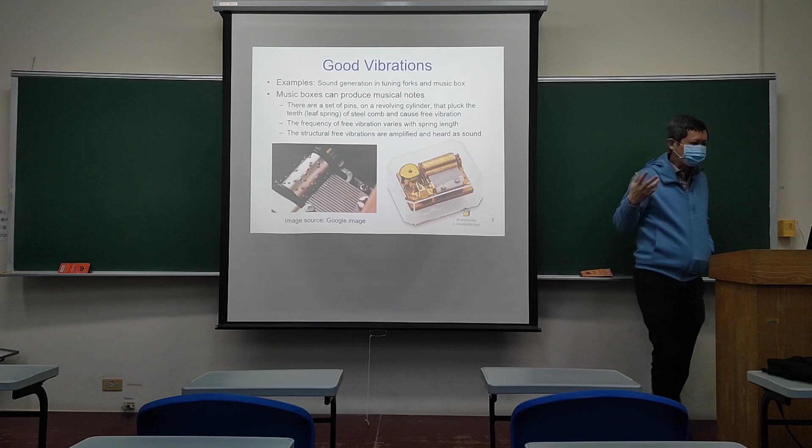Good vibration could be the sound created by a musical instrument. Sound itself is a vibration, but here we are looking at the structural vibration of the musical box.

What is vibrating are the cantilevers of different lengths. The longer the cantilever, the lower the frequency.

Basically, for an octave, you have 8 notes, and the frequency doubles. So here what you see is a drum with a protrusion.

This protrusion will then pluck the cantilever up and down. This small vibration cannot be heard without an amplifying box.

Just like shaking a ruler, you cannot hear the ruler vibrations, but with the help of the amplifying chamber, you can hear it. Another reason why you cannot hear the ruler vibrating could have to do with sensitivity.

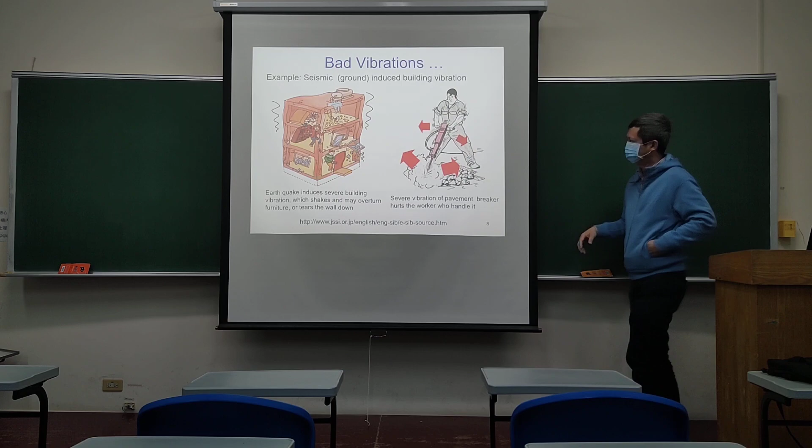Of course, you also have unwanted vibration. This is a musical instrument, but unwanted vibration happens during an earthquake, and unwanted vibration happens during concrete breaking. Using a concrete breaker, that kind of bad vibration could be dangerous, causing fatigue to the worker.

What's the objective of this course? We are going to learn the basic concepts about vibrations. So what are vibrations?

There are free vibrations. Free vibration means that after it was put into vibration, there is no more force that moves it to and fro.

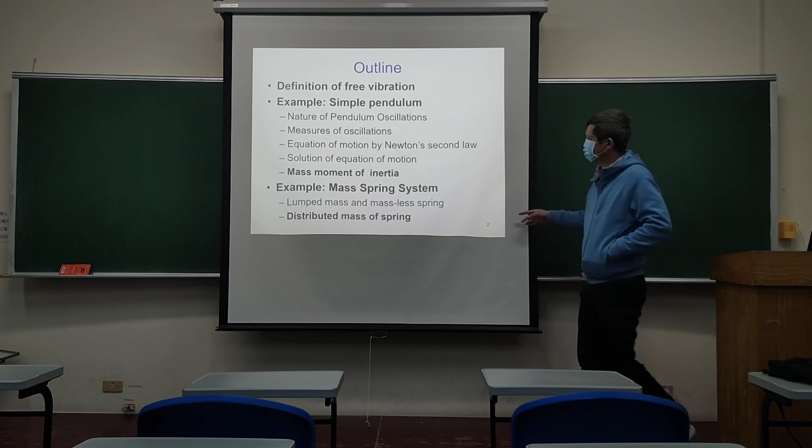So the first thing we're going to learn about is free vibration. The first example is going to be the pendulum, so we're going to study how the pendulum oscillates. I think you learned it in high school or secondary school, but this is part of the physics, and we're going to start with that.

To help you get a better understanding about free vibrations, we're going to first measure the oscillation, and then formulate the equation using Newton's second law. Most importantly, we're going to solve this equation of motion using a simple ordinary differential equation - we will use this simple differential equation to solve the pendulum's equation of motion. Later, we're going to introduce you to mass moment of inertia.

In the next example, we're going to study the mass spring system.

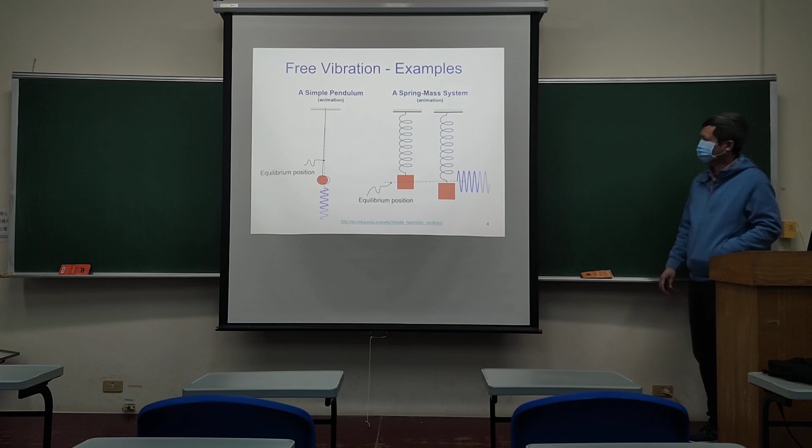What is the common thing between the simple pendulum and the mass spring system? You can observe that the motion of the pendulum is a left and right swing, going left, right, left, right. If you track the angle over time, you see this oscillation.

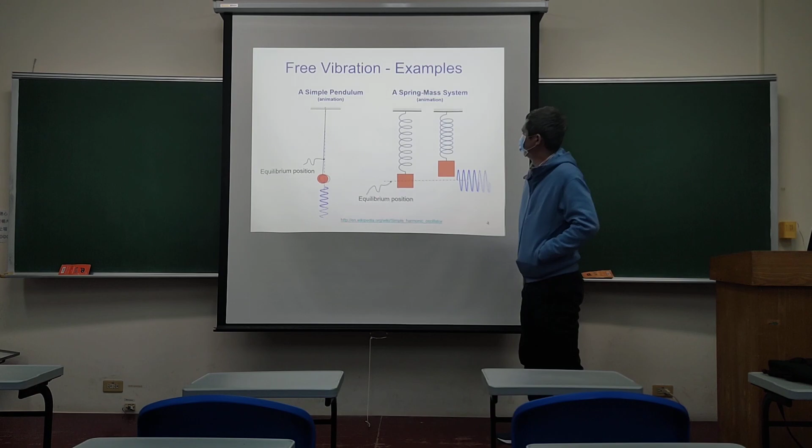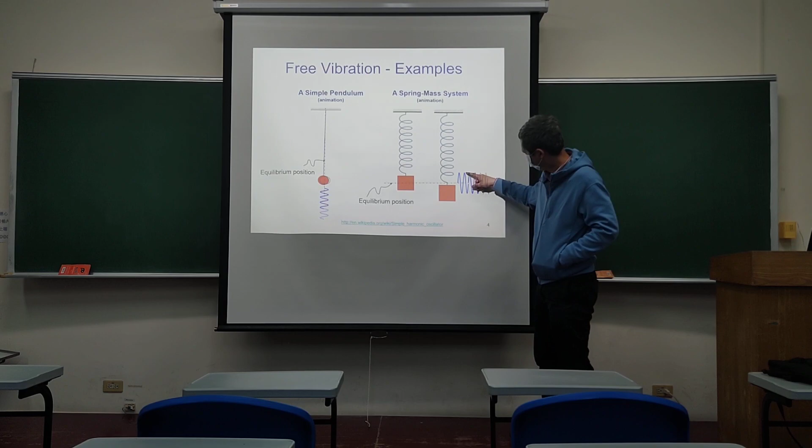In the mass spring system, you have a mass and a spring. When you release the mass, it starts stretching the spring. When the spring is overstretched, it recoils back, so the mass moves up and down, up and down. Following the mass center over time, you see a sinusoidal wave.

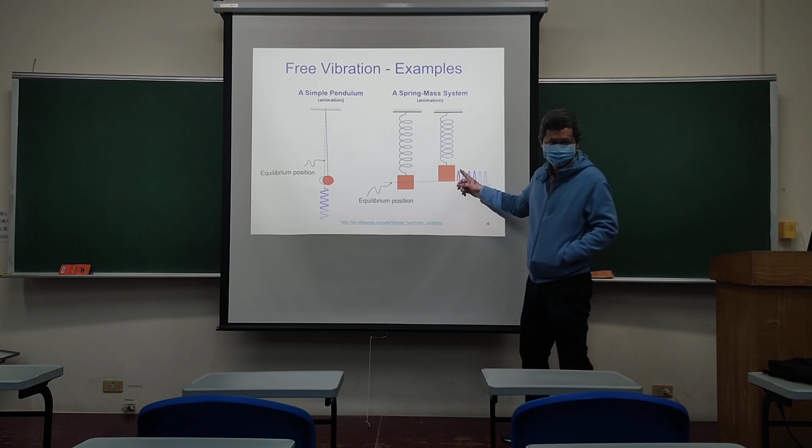This sinusoidal wave has a feature of repeatability of common period.

So how does the mechanical pendulum work? The invention of the pendulum happened in Europe, in Italy, in the Middle Age. Galileo invented this pendulum while observing candlestick vibrations in the church.

Let's see the reinvention of the Galileo pendulum.

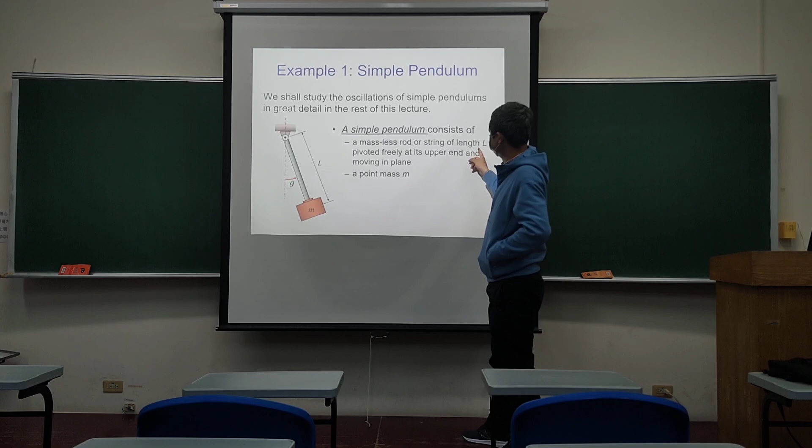One thing about a pendulum: it is a rod and a mass. Because the mass at the tip of the rod is so big, you can assume that the rod carries no mass. So in a simple pendulum, we have a massless rod, and at the tip of the rod you have a point mass. This rod has a length L.

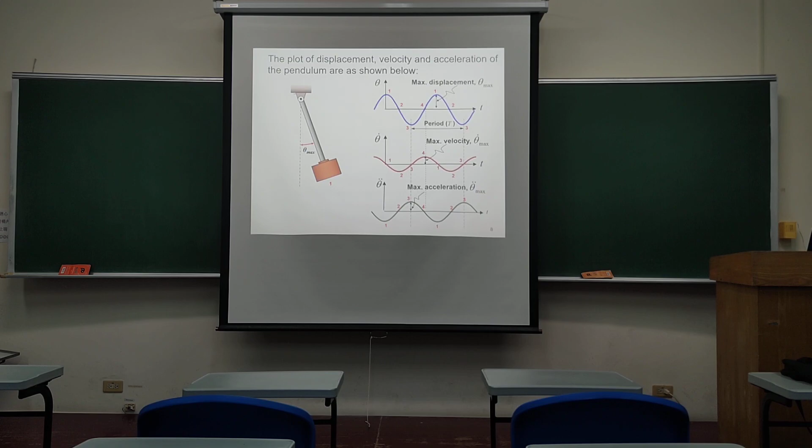Now we're going to see the motion. When you start the pendulum, how do you look at it? This room has a pendulum, like a broom — 单摆，这边的扫把。So this is a pendulum. If I start the oscillation, you can see it must start with the mass elevated up, and my finger will hold it like a pin.

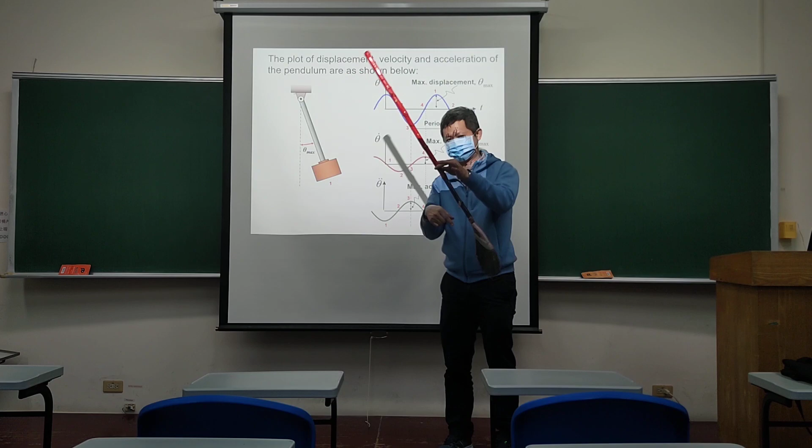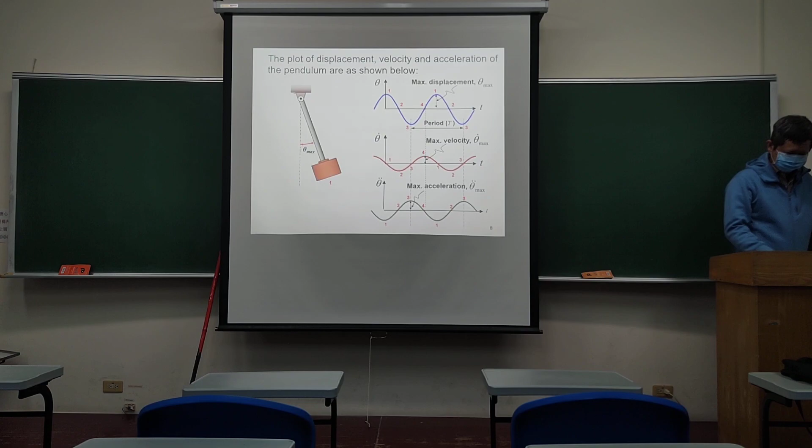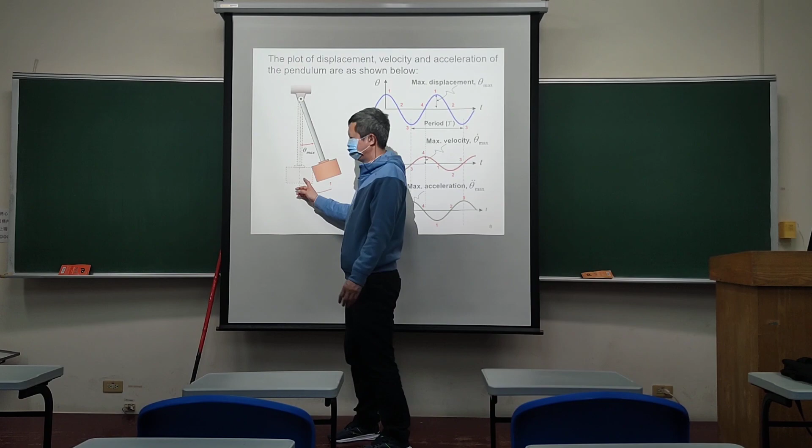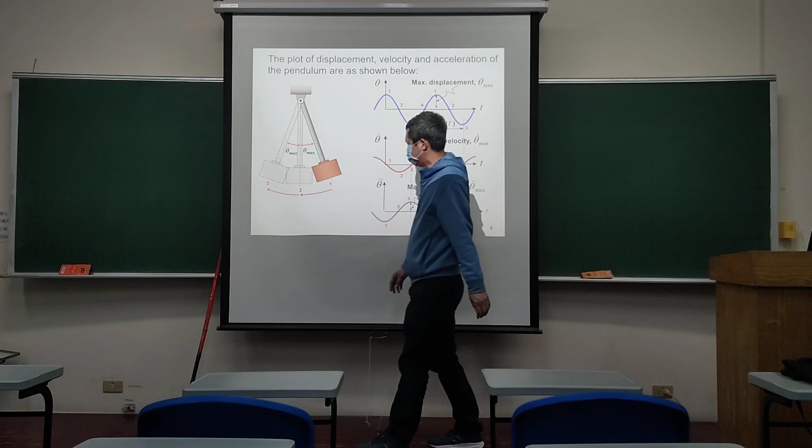When you start releasing the pendulum, you start with the starting angle, theta max. When released, gravity pulls the force toward the lowest point, so the mass gains speed moving to the lowest point. Once it reaches the lowest point, because the speed is non-zero, the mass keeps going to the opposite side. When it reaches the opposite side, most of the kinetic energy has been converted into gravitational potential energy, and it comes to a stop.

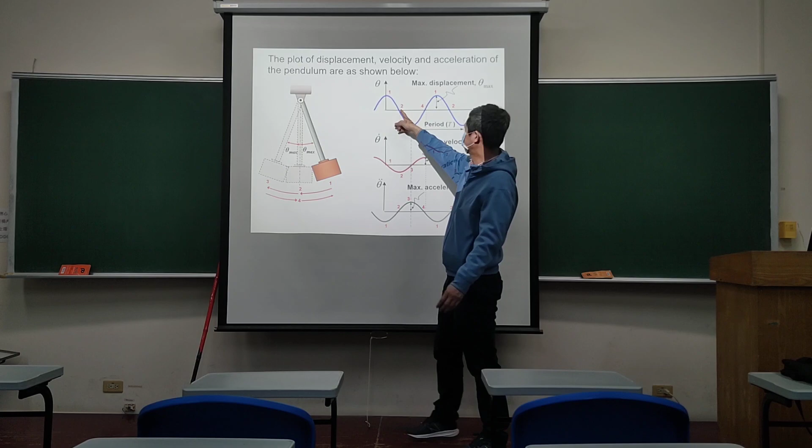If you track the angle, it starts at position 1 being non-zero. At position 2 it becomes 0. At the opposite point, the angle becomes negative. Once it swings back to the lowest point, position 4, it finally reaches the initial position. If you observe this oscillation, the peak remains the same if there is no damping. The time taken for one peak to reach the next peak is called the period. The maximum amplitude from the peak to the neutral point is called amplitude.

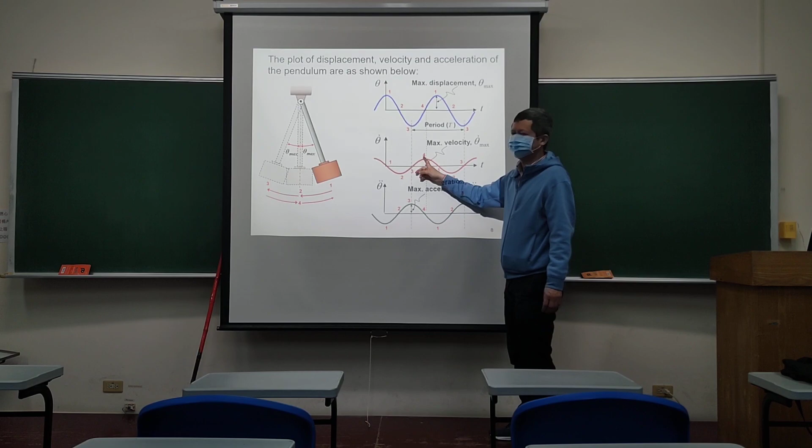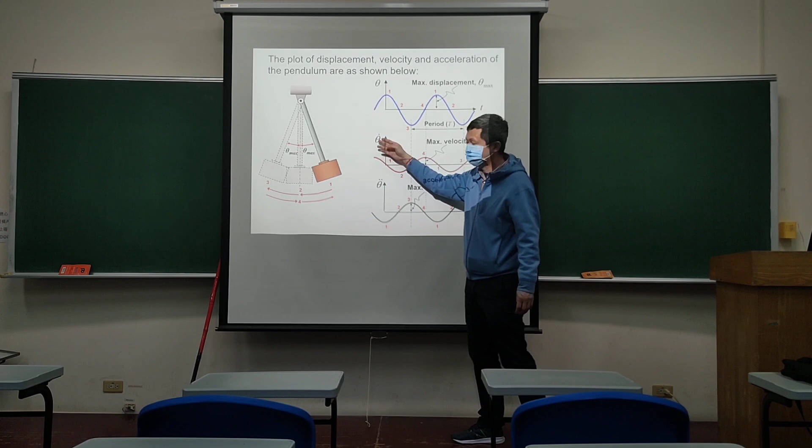If you do differentiation of this angle, you obtain the angular velocity, and the sine wave becomes a cosine wave. If you differentiate the angular velocity one more time, you get a negative sign. So your acceleration is a reflection of your angular displacement over time.

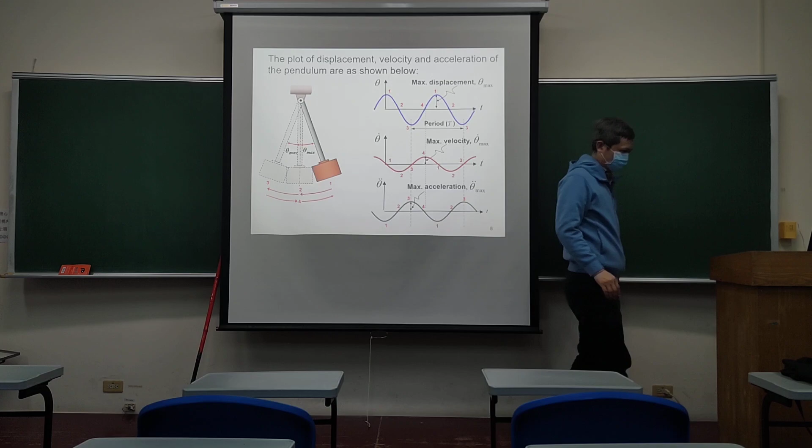This periodic motion can then be expressed as a sine wave. It has an amplitude called theta max, from the point to the peak, and you have the inner part of the sine.

Sine will become a complete period when the angle changes by how much? 请问角度要变化多少，这个正弦函数才会完成一周期？90 degrees?

你的这个正弦要恢复到原值，角度要变化多少，一个周期？还是一个周期360？Yeah, 360. So to complete a cycle for a sine wave, you need 360 degrees, which is 2 pi. So how many cycles do you have?

It is the frequency times the time. What is frequency? Frequency is the inverse of the period. If the time taken is 2 seconds, but the period is 1, it means you have gone through 2 cycles. For a sine wave, one cycle is 2 pi. So the number of cycles is your time span divided by the period.

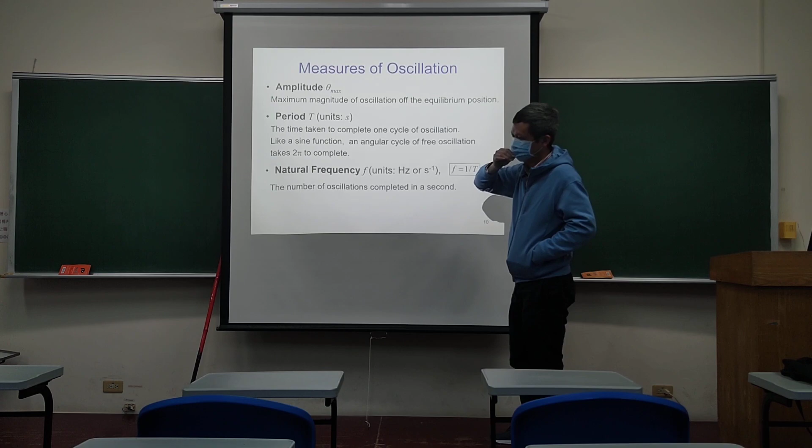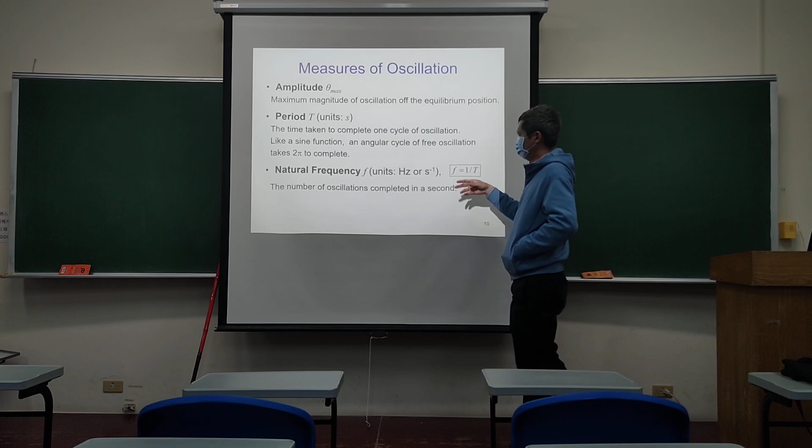Next we're going to define amplitude. Amplitude is the maximum magnitude of the oscillation from the equilibrium position. Remember, it's from the equilibrium position, not an absolute variable. The period is the time taken to complete one cycle of the oscillation, like the sine function, so you take 2 pi to complete one cycle.

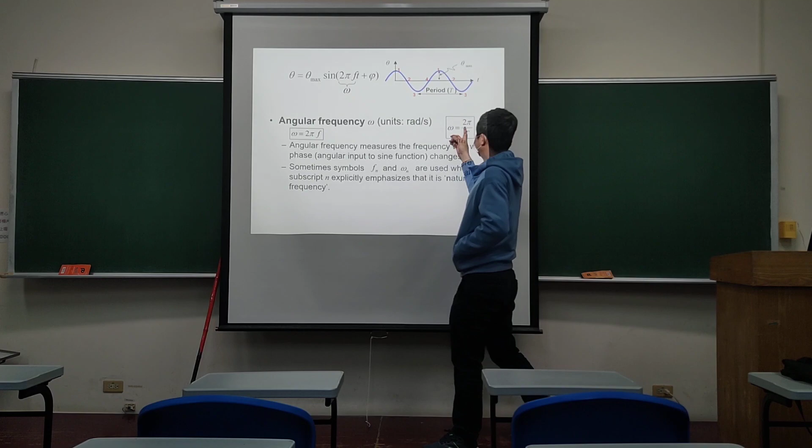The natural frequency is defined as one over the period. For ease of understanding, we also define angular frequency. Omega is 2 pi f, this is 2 pi over the period. This is what we call angular frequency.

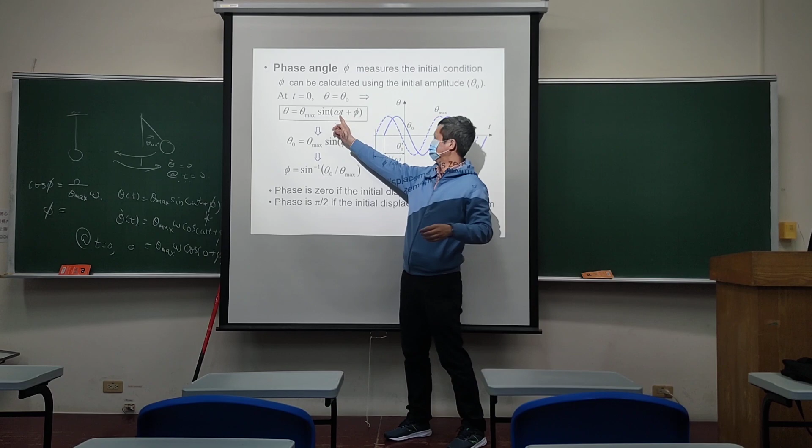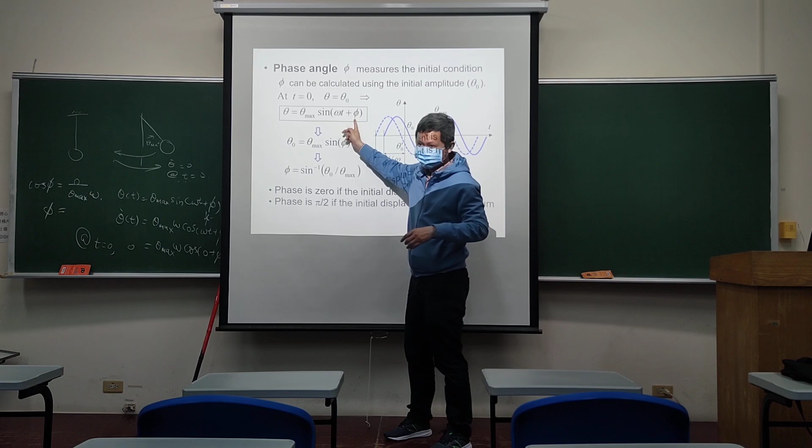The phase adjusts the starting point of your sine wave. In this case, when releasing the pendulum from a non-zero position but zero angular speed, the sine wave alone cannot describe this motion, because the initial conditions are different. If you use the sine wave itself, at time zero, sine is 0, meaning you won't have a non-zero angle at the beginning, and you'll have non-zero speed at the beginning if you differentiate the sine wave.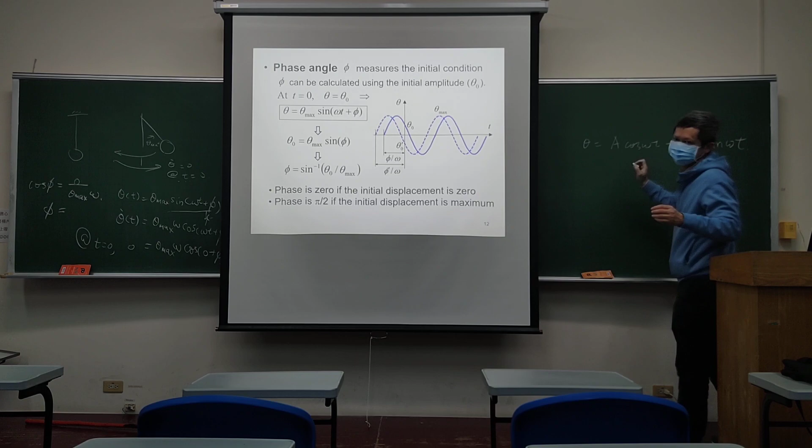So in this case, when we do the differentiation and comparison of the amplitude, we eventually find cosine angle is 0. What is the phase angle? Cosine angle is 0 at 90 degrees.

So your answer for this is theta max times sine of omega t plus pi over 2. And in this case, how is it related to theta max sine omega t plus 90 degrees?

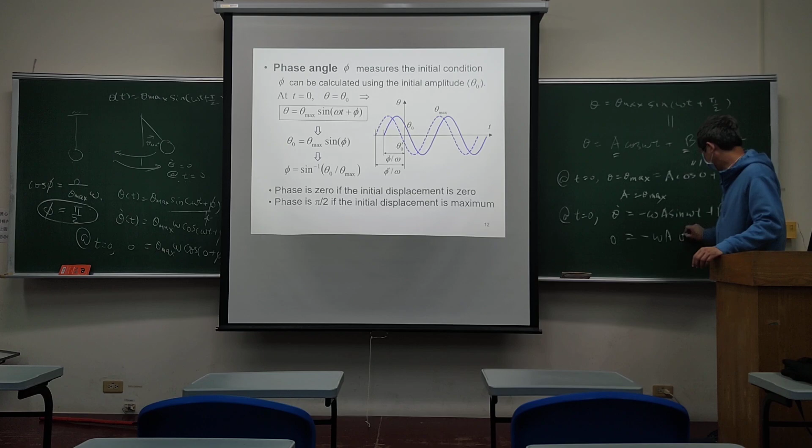Then the angular velocity for this case equals minus omega A sine omega t plus B omega cosine omega t. So you're going to have 0 angular speed at the beginning, and this is what you see for B: minus omega A times 0 plus B omega.

Sorry, this has to be cosine. Cosine 0. So in this case, what happens? Omega is non-zero, the cosine is non-zero, but the left-hand side is 0. So B is 0.

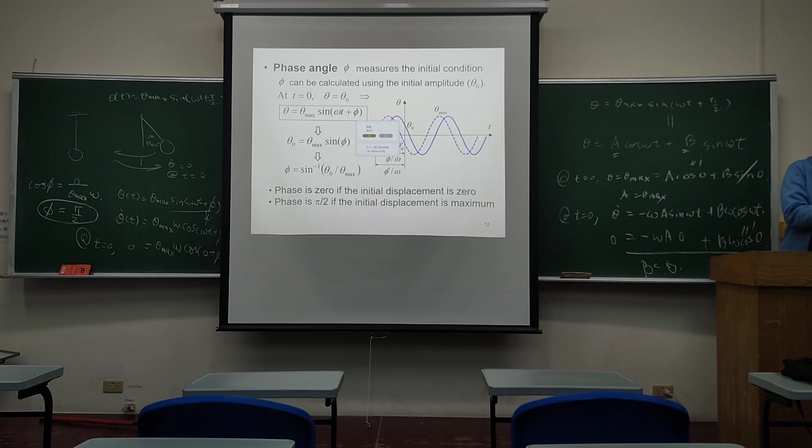Here the important point is we've got to start learning about the identity, and that helps us. What's the identity? So in studying this, we need to learn the relevant function, so theta equals A...

Substitute in your boundary conditions. So what do you get? A is theta max, B is... Upon substituting your answer, upon substituting the initial condition, you obtain the coefficients, and that ends up giving theta equals theta max cosine omega t, which is exactly what you obtain from the expression.

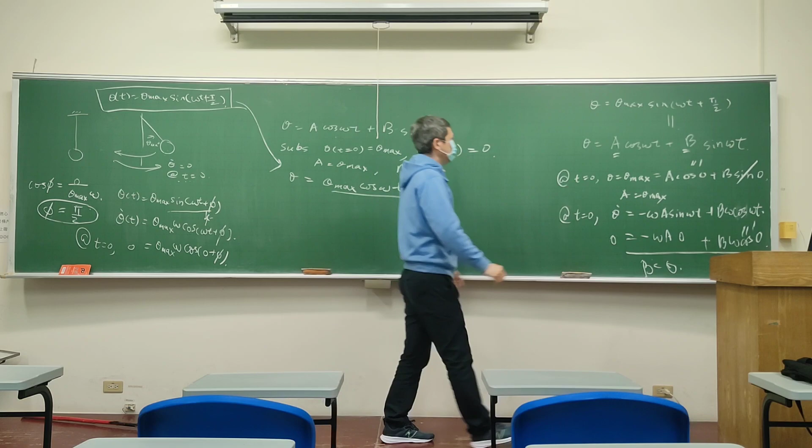Because of the identity of the two expressions, sometimes you want to convert the form from one to another. How do you convert the form? After learning the natural function, the whole process is about learning sine and cosine, but what we learn with sine and cosine is the trigonometric identity. So what you learn is about the identity.

If you're not sure what that is, then just take it. What is this expression? This expression, you can write it into what? What would you like these to be? So the same expression, but I can rewrite it as what? You need to write it as...

sin, cosine, cosine, sin. So if this is sin, this is your angle. So if written this way, because of this, you can rewrite it using the trigonometric identity, and this gives you sin phi cosine omega t plus cosine phi sin omega t. So in the end, you can write this as sine of omega t plus phi, with the additional square root of A squared plus B squared.

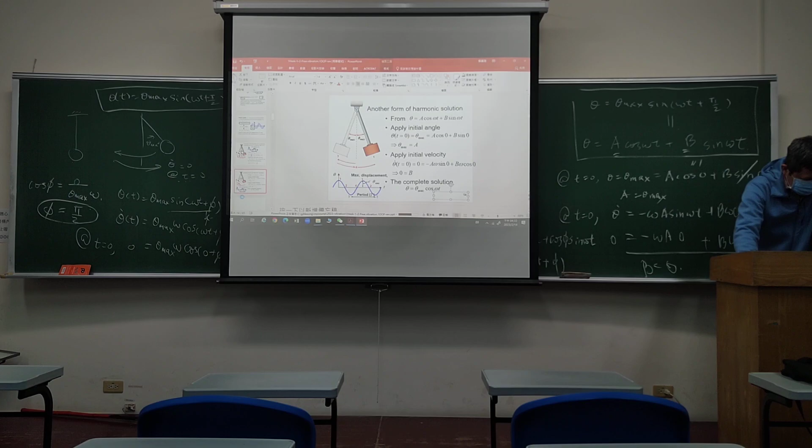Okay, the other one is an exercise. So the hint for that is... Phi phi, let's see where it is at. Okay, this is the hint. And also...

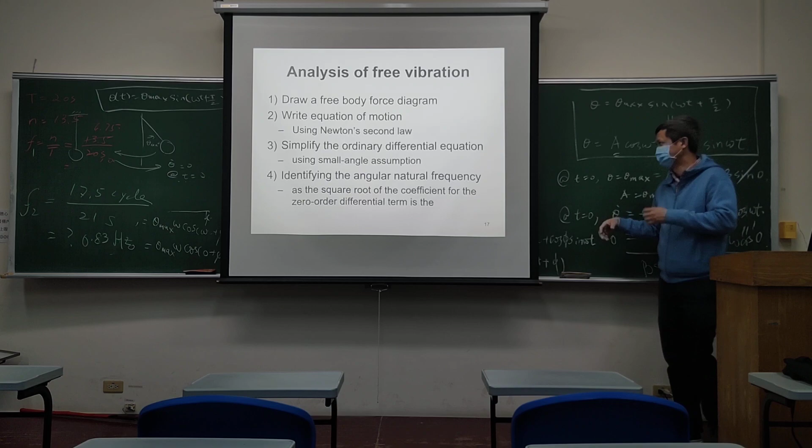This is so easy, okay? But I guess in your high school you only learn about a simple pendulum and an apple. You don't have it, or you don't support it in here. But in this case, there are variations of the pendulum. How are we going to solve it? We have to learn the method.

The first thing we do is write Newton's law for the apple. Our pendulum is made of an apple and a string. So this is not the apple from Newton, this is the apple from Galileo. But you are applying Newton's law to write the equation.

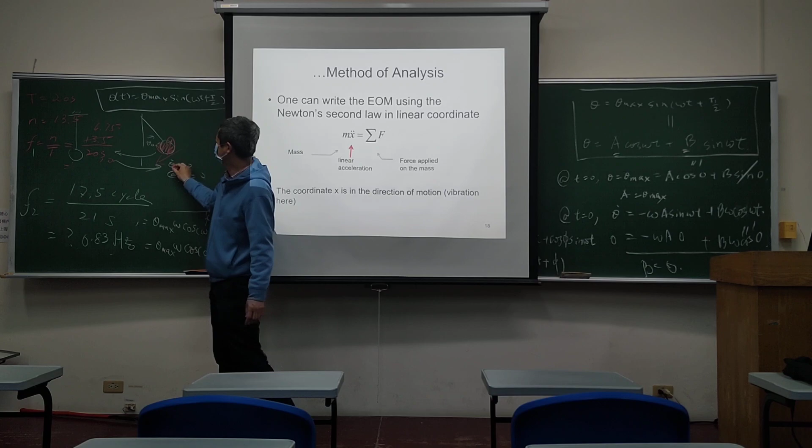When this apple is released, it's going to have tangential acceleration. This tangential acceleration is then equal to the pendulum arm and the angular change, so L theta double dot. So what is the force causing this?

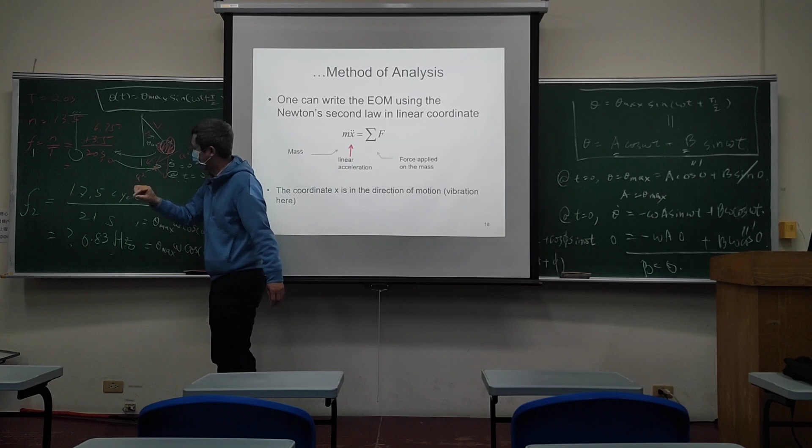It is the pulling force that contributed to the tangential direction. Where is this pulling force coming from? This pulling force is coming from gravity. So before you solve this problem, please draw the free body force diagram.

What is your free body force diagram? Before you define free body, your free body is a mass. Where is this mass position? This mass position depends on the rod. It identifies the clockwise angle to be positive.

And then you have the clockwise positive velocity, clockwise positive acceleration, all angular acceleration. So all in the same direction - that's the definition.

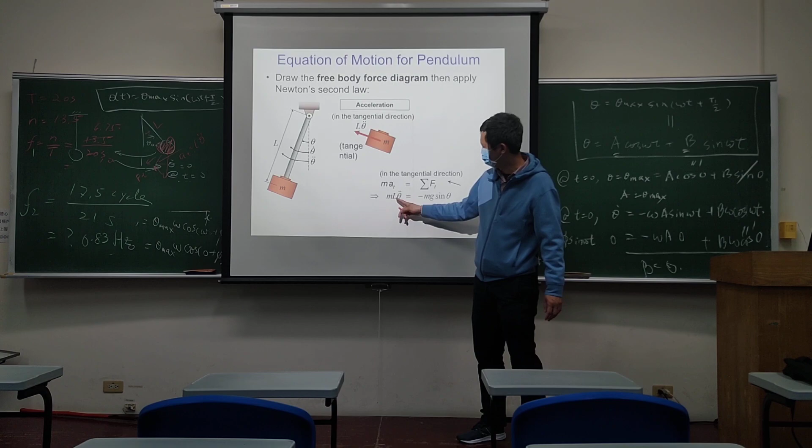And then next, your previous Newton's law, mass times tangential acceleration, cannot be written as mass times L theta if you are not sure about how the tangential velocity and tangential displacement relate to the angle.

This is the arc length, basically the arm or radius times the angle. So your tangential velocity is L theta dot, and your tangential acceleration is L theta double dot, because your pendulum arm doesn't change. What changes is then your angle.

Okay, next, what are the forces? At this position you have the gravity. Because of the gravity, there will be two components: one is the radial component, which is countered by the rod, and the other component, which is not countered.

This component is countering the direction of your tangential acceleration. So this is minus mg sine theta.

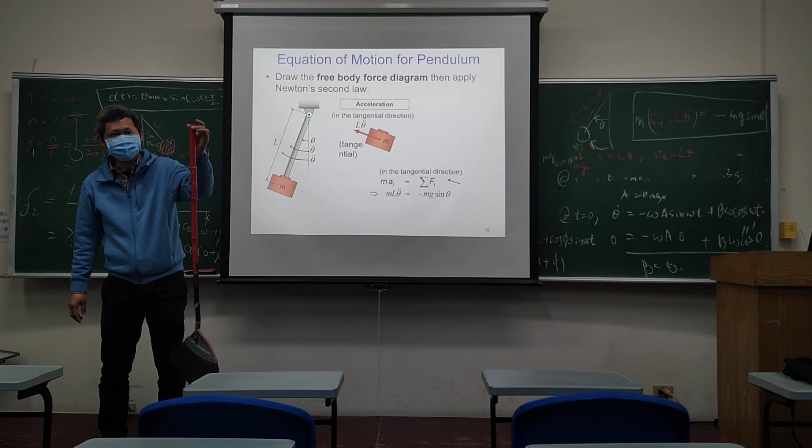The most important thing about writing the equation for a vibrating body is you need to know the positions of the body that will vibrate. This is the same pendulum rod, but it is at the equilibrium position. You have the weight countered by the rod tension, so they are not going to be at any rotation.

Only when you leave it so that the tension is still along the rod but the weight remains vertical, that vertical force will then have a tangential part to pull the pendulum back. So if your first drawing of the free body was drawn at the equilibrium position, you are not going to obtain your free vibration equation. The free vibration equation must be taken away from the equilibrium position. That's the way.

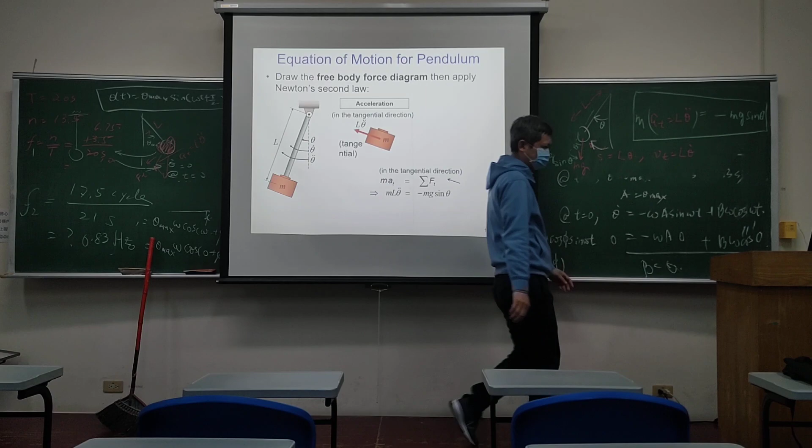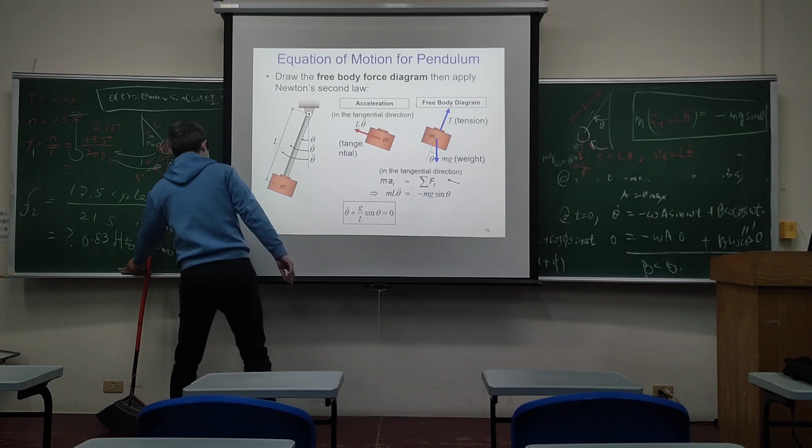And then next, after you write the equations, we're going to do the simplification. So let's move the equation: m L theta double dot plus m g sine theta equal to 0.

Assuming the angle is small, sine theta is nearly equal to theta. In this way you obtain a second order ordinary differential equation. So we divide both sides by m L. Then you have this being 1, this being g over L.

And this is what you call your equation of motion. So what's the solution to this? Even though you haven't done any mathematics, by looking at the physics, what would be the solution?

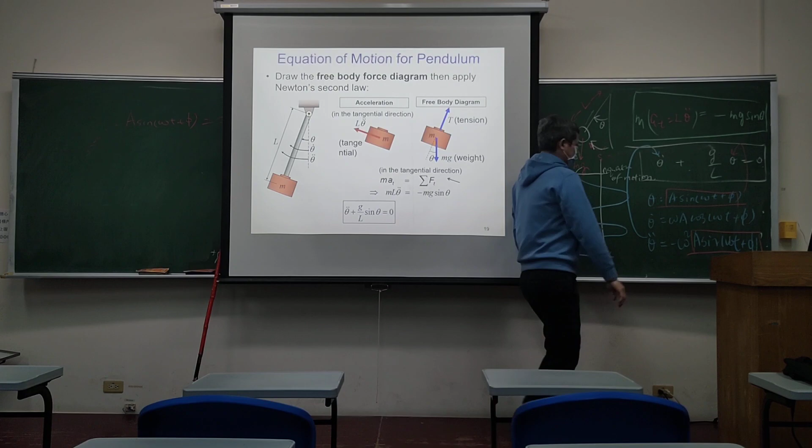Besides this common factor, the first term will then be minus omega squared, and the second term has a coefficient of plus g over L.

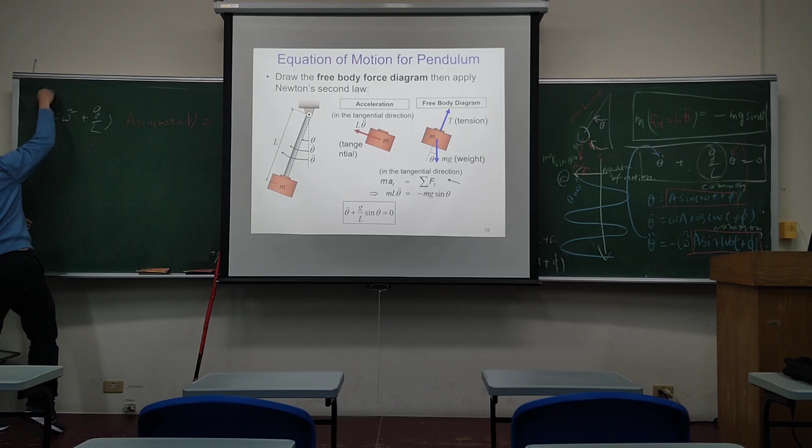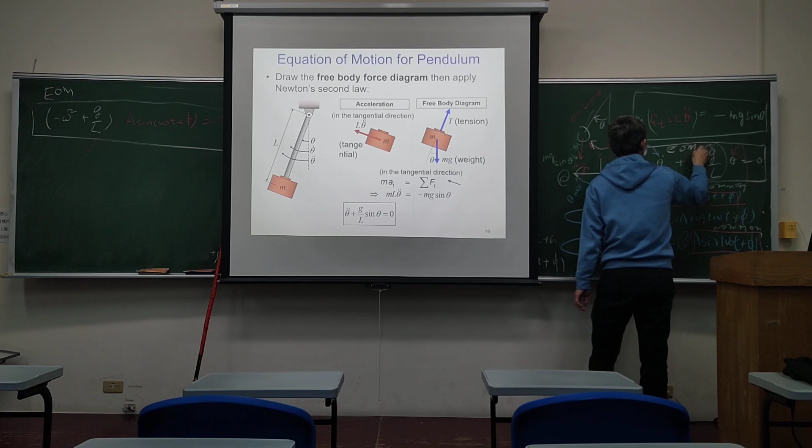So this is my equation of motion re-expressed. I'm talking about this equation of motion, obviously derived from Newton's law.

Let's check. What is the solution? Is the amplitude 0? Not 0. But the right hand side is 0. Is the sine 0? Occasionally. So it's most of the time not 0, otherwise there will be no oscillation.

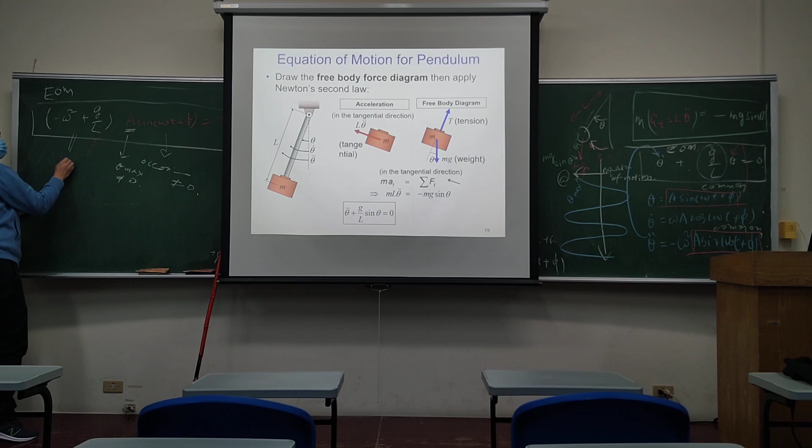And then what must be 0? Since your right hand side is 0, your left hand side has one term that must be 0, and this is it. So you have omega squared minus g over L equal to 0, and then omega equals the square root of g over L.

And what is omega? 2 pi f. So as a result, your frequency is 1 over 2 pi times the square root of g over L.

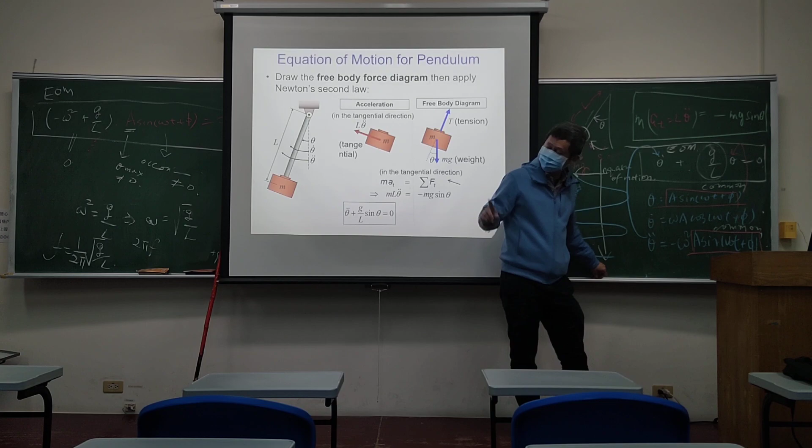So you can see now here, what is the relationship for frequency for a simple pendulum.

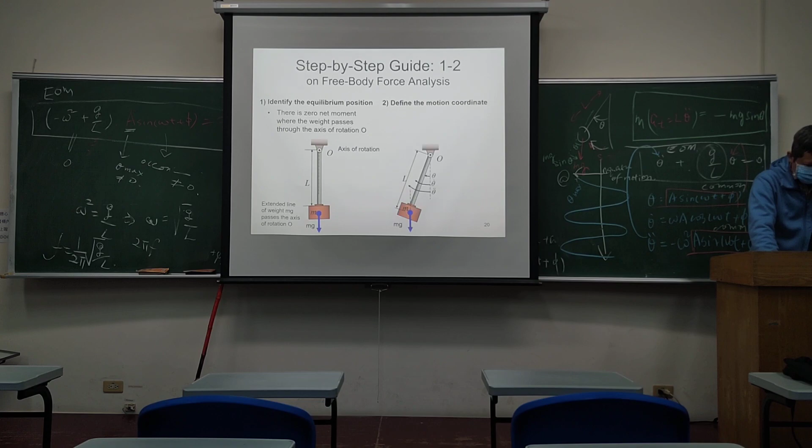Okay, let's go through with you the step-by-step guide on the diagram. So here you have the equilibrium position. Next, you perturb it with an angle, and from that angle you have the angular velocity and angular acceleration.